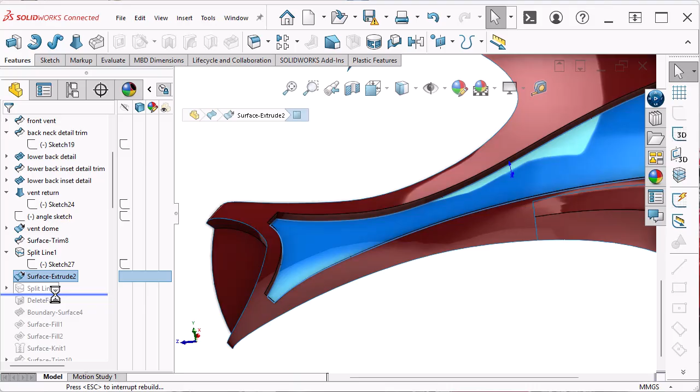So now I take this and split that face again. I just use a straight line and split it right here. Then I delete all the faces in the back.

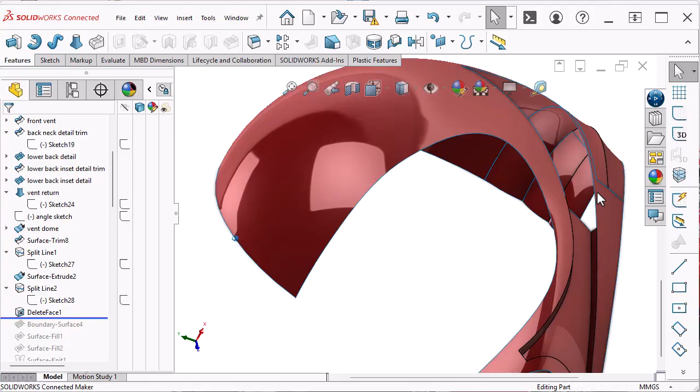Now what I'm getting ready to do is kind of the point of most of the exercises in this model: to blend in a couple of shapes and make something that has hard edges blend into something that's smooth.

I'll get this boundary surface, and I can loft this boundary surface from that edge on that extrude feature to this edge on the face of the finished model. That allows me to get that blend. This boundary surface doesn't have any sketches under it because I'm just using model edges.

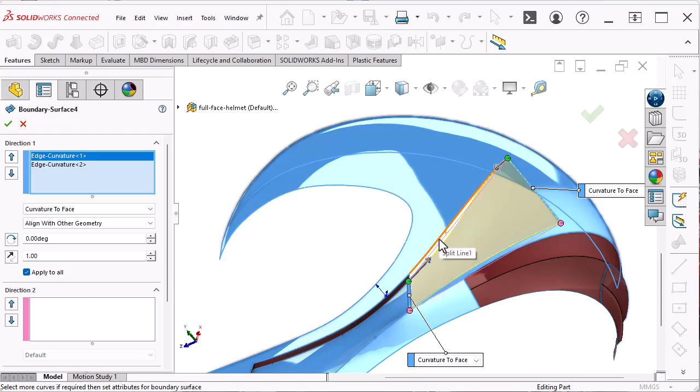In this case, I'm not using any sketches at all. These two edges are selected, and the curvature constraint is used for both of them. One thing you have to make sure of is that your surface doesn't get tangled up with the main surface as it goes underneath. I use these two surface fills to fill in these side gaps.

Most of the time when I do things like this, I'll at some point knit a bunch of surfaces together. Why is that important? It's important if you're going to manufacture this thing and want to actually make a mold. You don't want to send the mold maker just an accumulation of faces—you want those faces joined together into a single body.

And in fact, eventually you'd probably want to make a solid body out of this. Making a solid is really just proving that your geometry is good—watertight, manufacturable. It's not a figment of your imagination; it's really possible in the real world. Knitting together surface bodies into a single surface body is a step towards that.

It's tempting very often to knit something together and then make a solid out of it just to test it, then tear it apart again, and then you have to knit it back together. So you'll know if a model has a lot of thicken features or knit features that knit a surface into a solid—you'll know there are problems with that model, because going in and out of surfacing a lot is very inefficient. It's best if you can just work in surfaces until that area of the model is done and ready to be made into a solid.

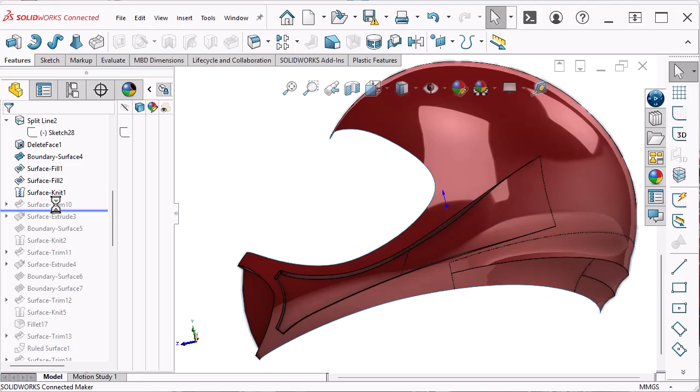Another trim here—we've got a section knocked out of the top of the helmet. This is another what I call a reference tangent surface. I'm going to close this gap in, but down at the bottom here I did this with sketches. Here I'm doing it with an extruded surface.

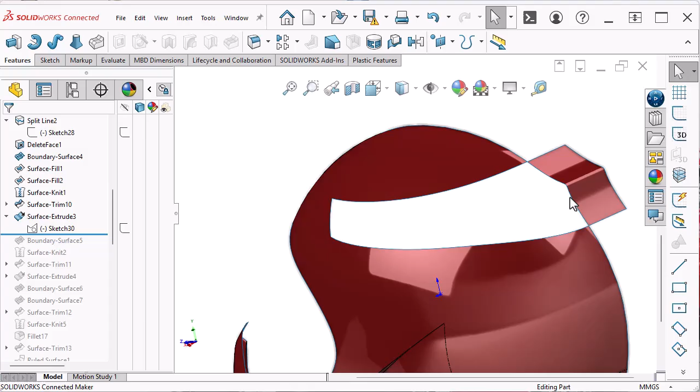Is there any difference? Yeah, there is. I think on a sketch, the best you can get is a normal-to constraint when creating the boundary surface. But on a surface like this, you can get a curvature-continuous constraint. Curvature continuous to an extruded surface is going to start out with zero curvature because an extrude has zero curvature, but curvature continuous to a curved surface is going to be a different situation.

Let's take this and hide it because we don't really need to see that. And then we knit that together—we're just knitting these two surfaces.

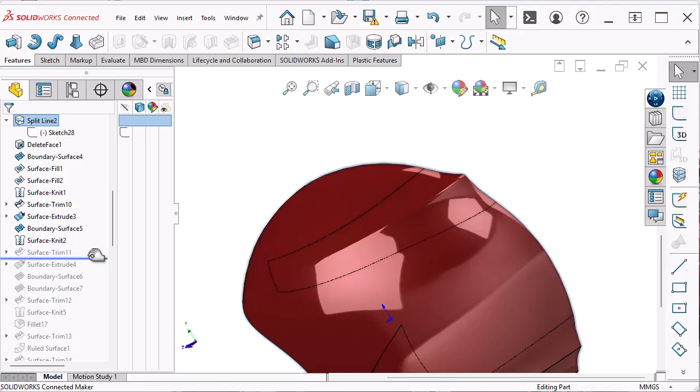And then, you're going to see a pattern here: we do a trim, we do some sort of an extrude to create a reference surface, and then from there we create a boundary surface. You notice that my reference extrude in this case didn't touch the other side, and that's because I'm making a gap there, and that gap is filled by the second boundary surface.

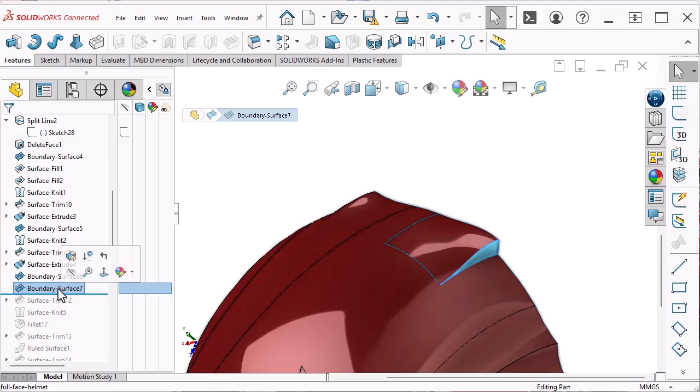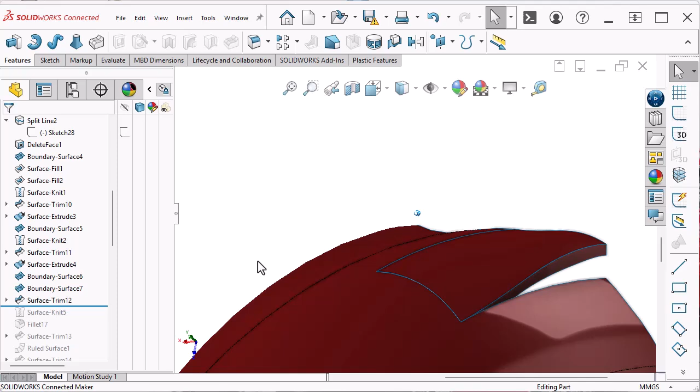This is essentially just another vent that goes on the back of the helmet. After that vent, we're simulating the thickness of the plastic with this boundary surface that was put in. After that feature has been built face by face, we knit it together into the main surface.

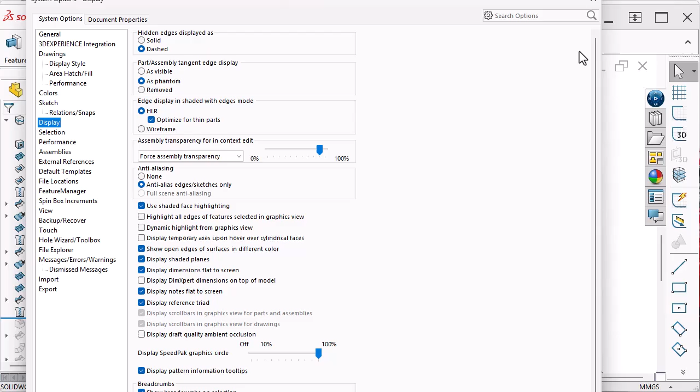You notice that some of my edges here are looking nice—like this edge has a line font on it, what they call a phantom line font. This is because I have a setting in Tools, Options, Display, under Part/Assembly Tangent Edge Display. The default is set as visible, but I like to use phantom, because that means I can know that if this edge is tangent, it's going to show up in this special line font.

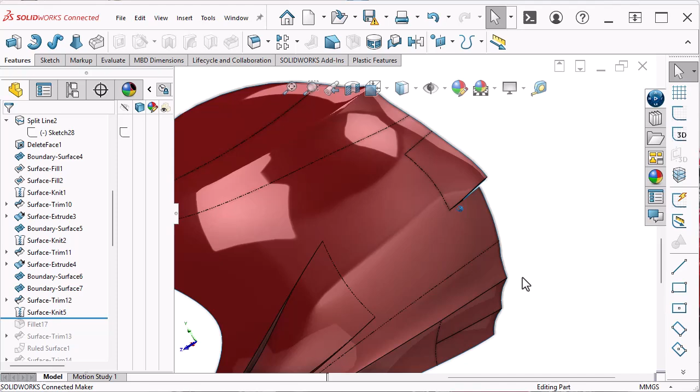If an edge is sharp, like this one, then it's going to show up with that solid line. Another thing I want to point out here is that this feature was created from a sketch that had a break between entities. So this is a spline, and then this is a non-tangent spline, or those could be arcs or whatever they are.

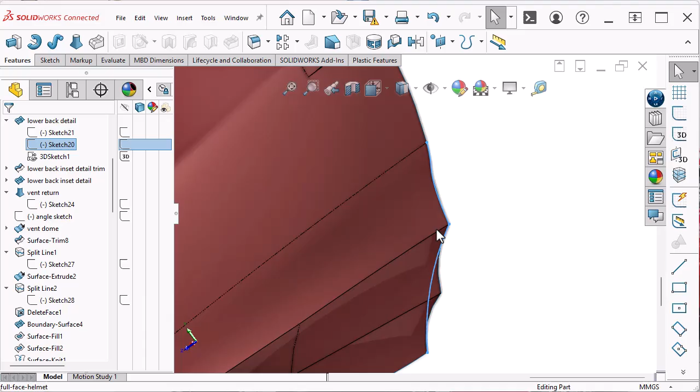So the point is that they come together at a point and create a hard edge in the model. If you look at the way this was done a little differently—this extrude is made differently, so that this is a single spline that goes across, and instead of a sharp edge, I've built the fillet right into this. So this is smooth. These are two different ways of creating the same sort of thing.

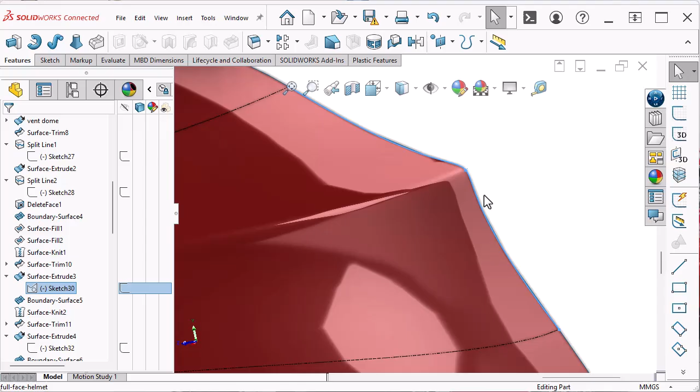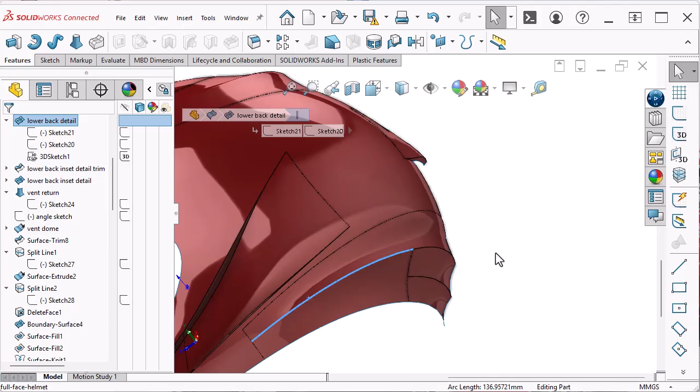Later on, I'm probably going to have to come down here and struggle with getting a fillet across this edge. Same thing here, because getting a fillet to taper down to nothing and go across another edge like this is taking a risk. But I can tell you that doing something like this is a little cleaner—in fact, it's a lot cleaner, and it's not taking as big a risk with that fillet.

So, two different ways of doing things demonstrated on similar features.